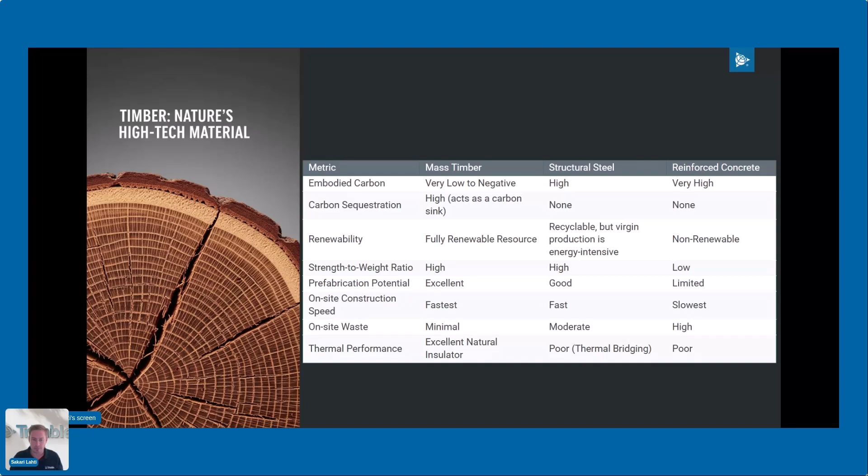Of course, it's not the material for all different places and occasions. There are other materials with good characteristics, so you always need to consider the best material for the best location. But it's definitely something that will likely increase because of this environmental push for greener construction.

One big trend happening generally in construction is that you need to build faster, build smarter, have prefabrication, have automation, and all of that is very well linked with the possibilities of timber construction. That translates often into requirements for the software, and especially what we can see is missing from the market—if you're doing hybrid construction, which is the trend in timber construction anyway, you need that multi-material capability of combining different materials to come up with the most optimized solution from the building aspect.

And you need that level of customization just for the timber connections, for example, when you combine steel with timber. Projects are getting bigger—the owners and contractors are getting more ambitious on building with timber, and that creates pressure for the software you use for design to have the capability to handle large models, with multiple people working on the same model at the same time.

So taking these two aspects moves things away from traditional timber-only focused software to something more generic. And of course, customizability—you need that flexibility to define your own connections, do the detailing like you're needed to for that exact project. You need interfaces to different systems and also to different machinery, as explained, so you need those APIs to connect to multiple different places.

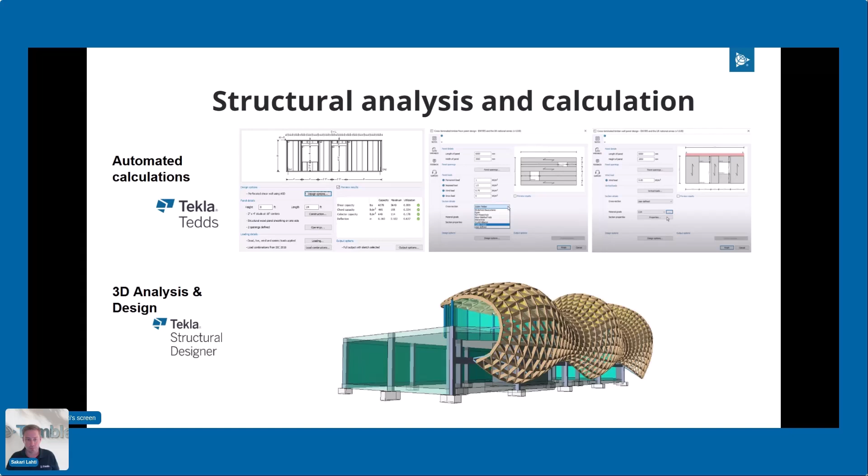If you look at the Tekla offering for timber, we have Tekla Tedds, which is a great tool for simple calculations, and we have quite a few different libraries created for timber construction. That software has been heavily used already for quite some time. And of course, Tekla Structural Designer is capable of handling timber as one of the materials for design.

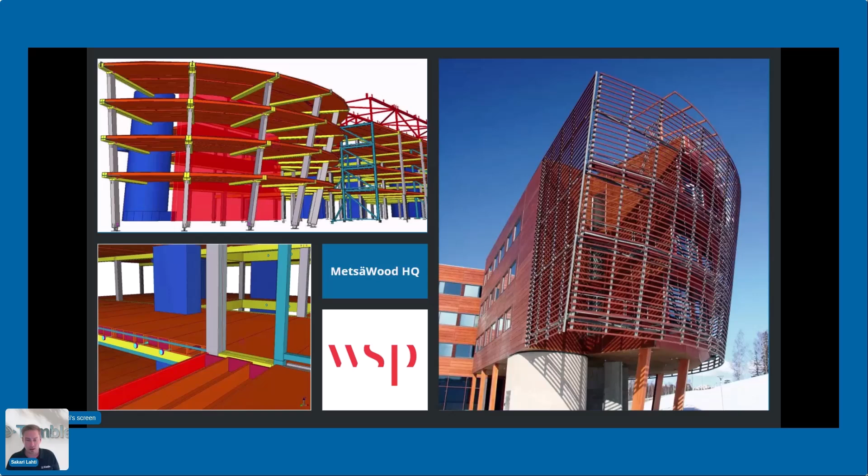And if we go to Tekla Structures, timber has been used with that also over decades, so not a new thing in that sense, but it's something our customers just realized when they first started with steel, and then they had a project that needed timber, that our tool is actually quite flexible and capable for that.

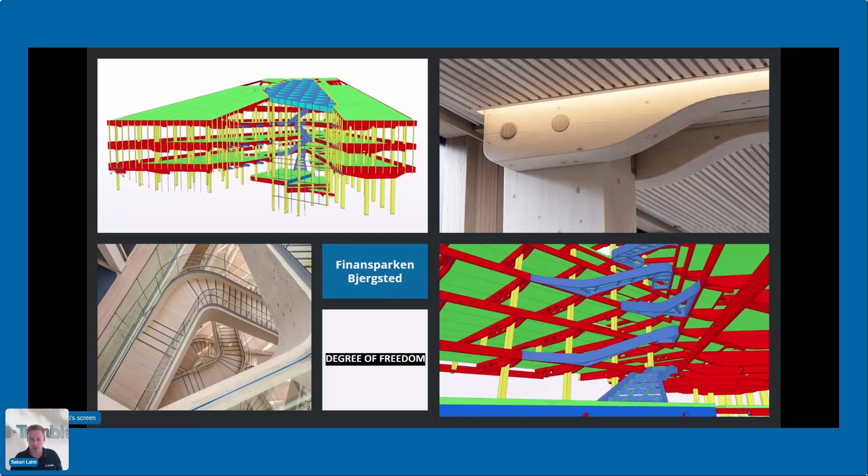So just a few examples, also really nice projects done all over the Nordics, in Sweden especially. Great achievements there. But I want to take a moment to promote Finland, where I'm from.

Just a week ago, this project won the highest architectural award in Finland. It's called Katajanokan Laituri, which is right at the city center of Helsinki. The architecture, the scale, and the beauty of the building is so nice. I highly recommend visiting this building in Helsinki if you by any chance are visiting Finland.

Here is a short video of the project images blended with the structural beam model that contains timber, steel, precast, and cast-in-place structures of the building.

Some numbers of the project: it is Finland's largest mass timber building by volume. Now that it's finished, last year, over 7,600 cubic meters. It almost had 2,500 unique prefabricated elements, and the timber used in that has stored over 6,000 tons of CO2.

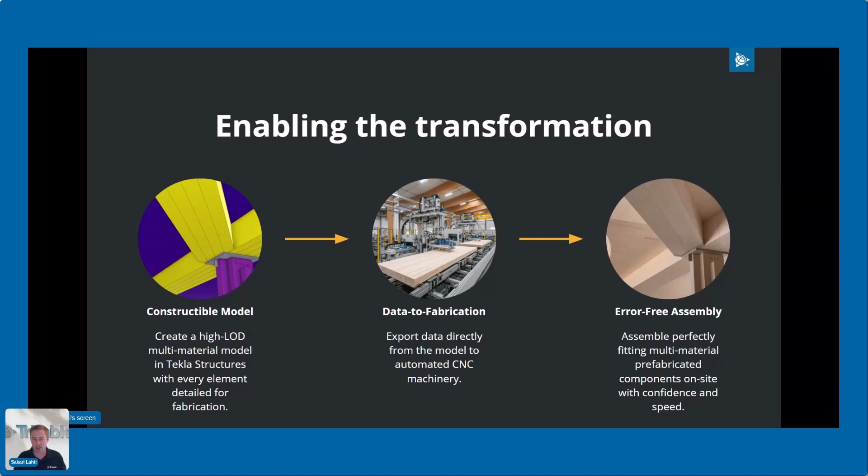Stora Enso, who was the timber manufacturer for those structural elements, took that data and transformed it into automation data in the fabrication. And of course, this process leads to an error-free assembly.

Looking at the problems in timber construction in general, I see two categories in my opinion: one is around standardization on many different levels, and also the production data, how to commonalize that process so you don't spend time iterating the same information to different systems and making errors during that process.

One example about standardization, you can probably find by Googling TIM 2025. There was a project last year or this year completed in Finland which had the goal of unifying the methods of modeling, not the actual modeling, but what the final output of the model would be for the timber industry in the BIM environment.

With that project, there are also some standard drawings, or let's say recommended drawings, for how drawings should look in timber construction. These kinds of agreements or guidelines are really good to standardize the industry, and it also helps us as a software provider to provide something that is not just for one customer, but for many customers.

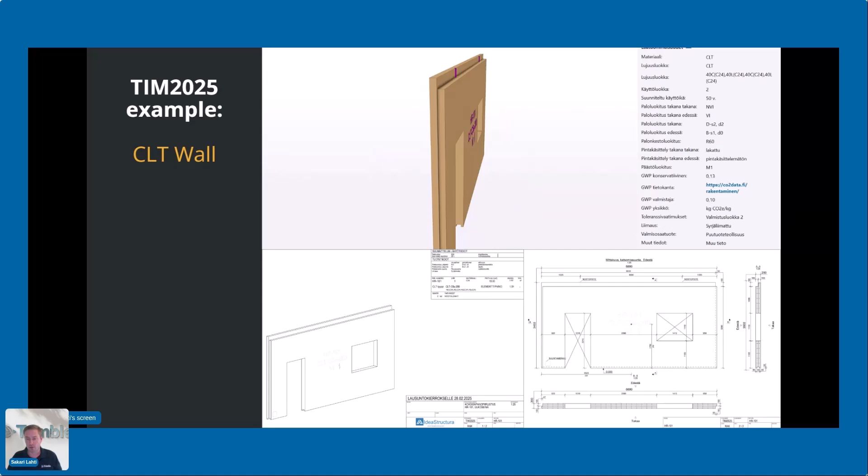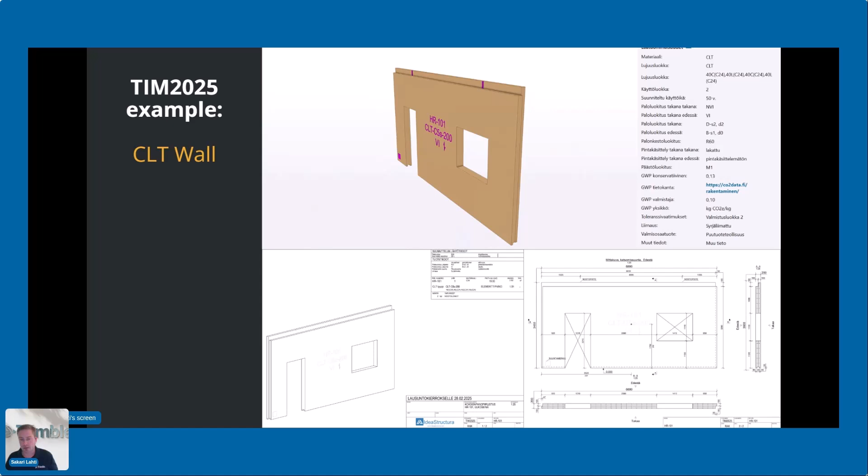And it also creates some motivation for us to deliver common methods of modeling these kinds of timber objects.

A little bit about the process of timber from the timber manufacturing point of view. When you do a project, there's roughly 30% happening in the BIM coordination. You coordinate with the structural engineer, then you do the detailing, which is the bulk of the work.

Now with Tekla Structures, like mentioned in the Katajanokka project, you can create those IFCs that the CNC machine operators use, and they can convert that information in their software, and they can define those critical processing information, which is the operations, the grain direction, and the placement for production.

Anyway, in mass timber products like CLT, you do the production through nesting. So you want to place those different elements and optimize the usage of those big CLT panels in the production. That is what is happening anyway on their side in the CNC operation.

But we do have, for products that don't necessarily need nesting, BTL formats available via our partner Construsoft, who provides these exports where you can go directly into production from Tekla Structures. Of course, that requires that you define those operations in Tekla Structures and in those cut part objects, but that can enable a workflow to production without the additional nesting need.

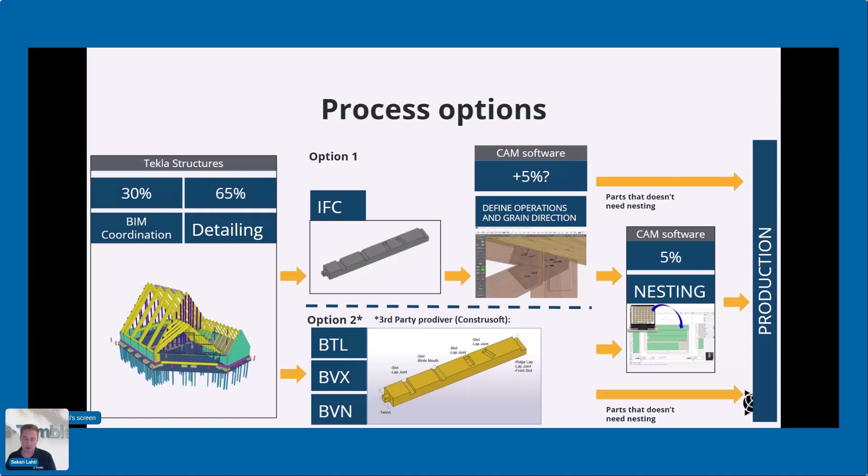Okay, let's go to 2025. What's new there regarding standardization and something we've acknowledged for quite some time, that we don't actually offer any kind of timber tools with the software. Now we have timber objects provided in Tekla Warehouse, and the benefits of using these tools...

depends on the preference of the customer. I would say customers have been using steel objects or concrete objects to model timber objects. But now, when you use these tools, you can have your own customized standard settings, so you don't need to mix them with other materials.

It makes it easy for anybody to learn and find the tools that should be used. There are also predefined properties that are visible only for timber objects and relevant only for timber objects, so we don't pollute the UI with information that's not relevant for other object types. These properties can also be used in a filter, so you can easily see which objects are timber object types.

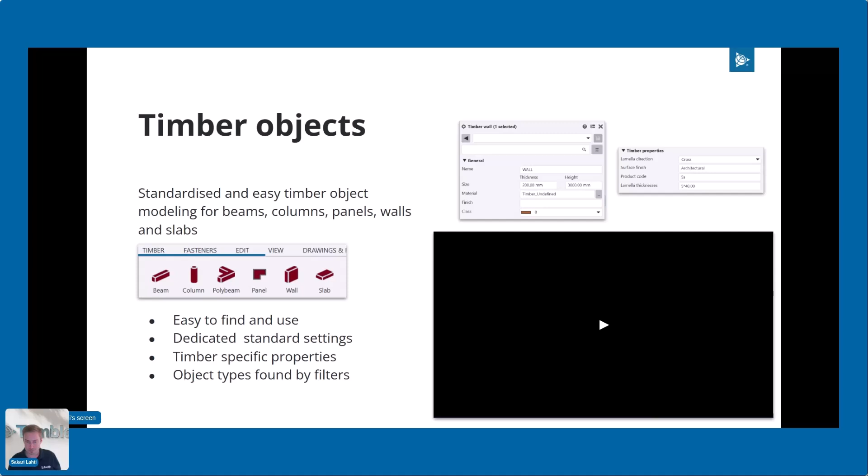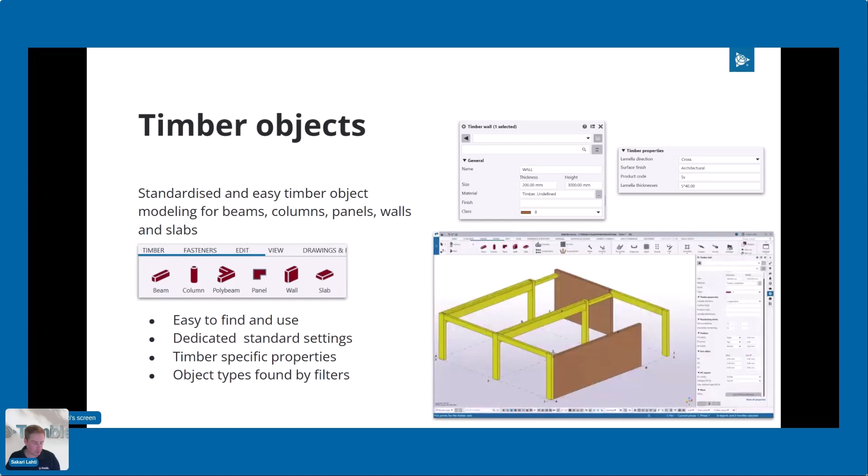Let's see if the video plays. Yes, I think it's playing. Here you can see very basic usage of those tools, and I think we might have time for a short live demonstration also, if I just know how to switch to my actual screen.

So if we go here, yes, and then Tekla Structures. Will somebody... thanks. So you will get this timber tab in Tekla Structures once you install the extension, and these are the tools that will come with it.

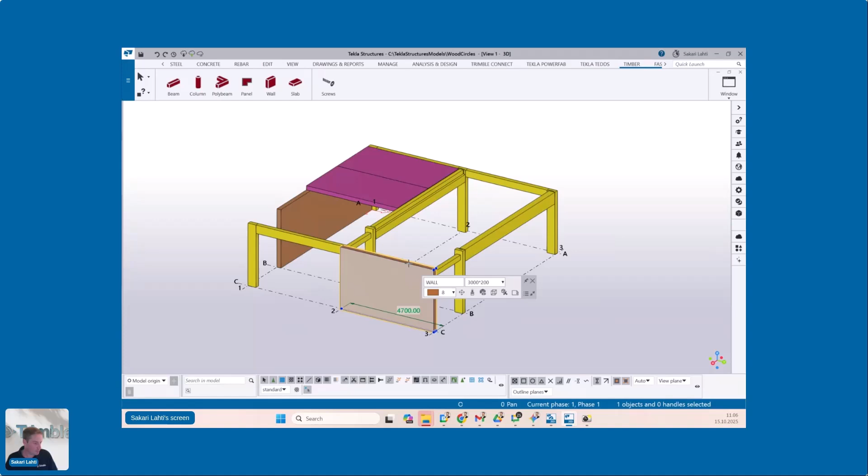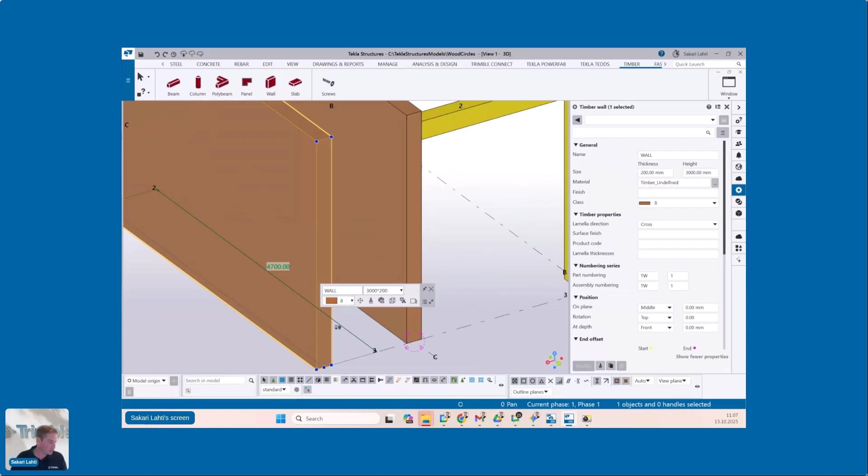For example, the wall modeling is very similar to concrete panel modeling, but a few things I want to show here is that it's actually called a wall, not a panel, and it only has thickness and height, which is quite nice for any wall type, as you might have situations, for example, you might have situations where you have different...

Sorry, I'm getting pop-up messages on the other screen about expanding the view area. You might have situations where you have different heights, but you would only want to change, let's say, the thickness for the walls. With this approach, that is possible, and it also makes it unified, what is the thickness and what is the height. As you know, with the parametric profile you have something like 160 times 3000, which is the profile.

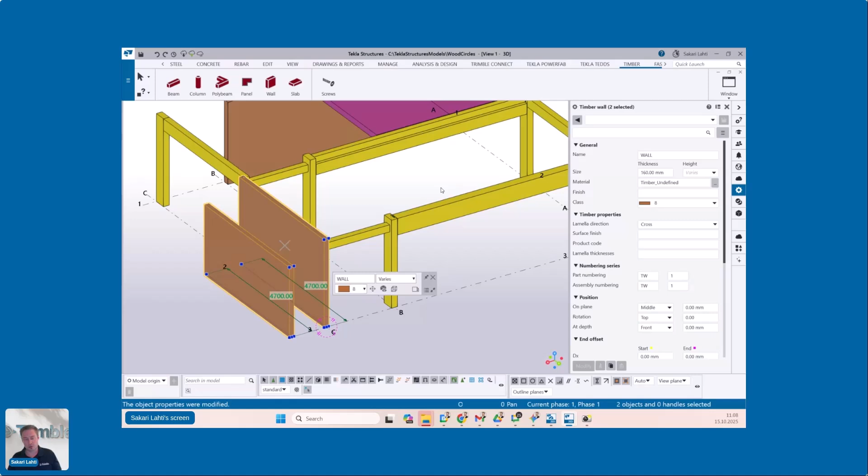And underneath that is the profile also here, but depending on the user, they might have a different way of defining that, and that then leads into problems when you start to create drawings or send data onwards.

One aspect regarding the speciality of this is that if you have defined, let's say, CLT materials, for example like here, you can find actually, if you go to Tekla Warehouse and type CLT, these exact examples from our main CLT providers in the market.

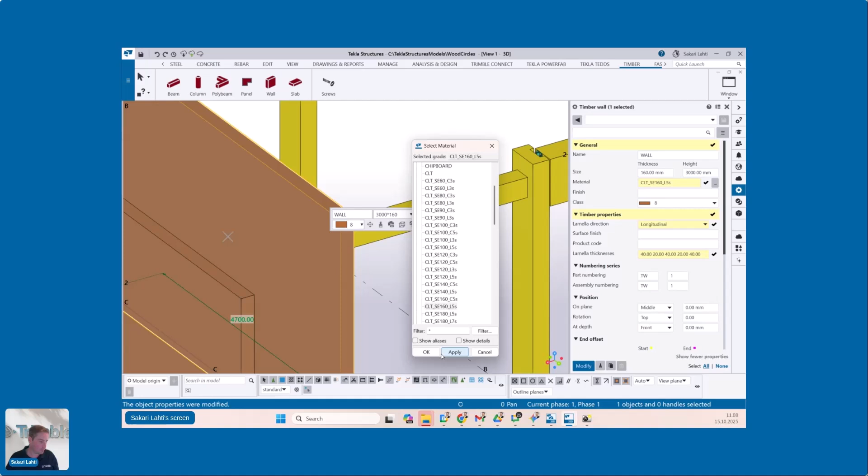But anyway, if I set this type from this manufacturer, you can see that it automatically fills the lamella thicknesses property, because that is defined also in the material product code. It would also have changed the thickness of this wall, because it wants to make sure that if you go from that route to define what CLT you're using, it will actually change all of those properties.

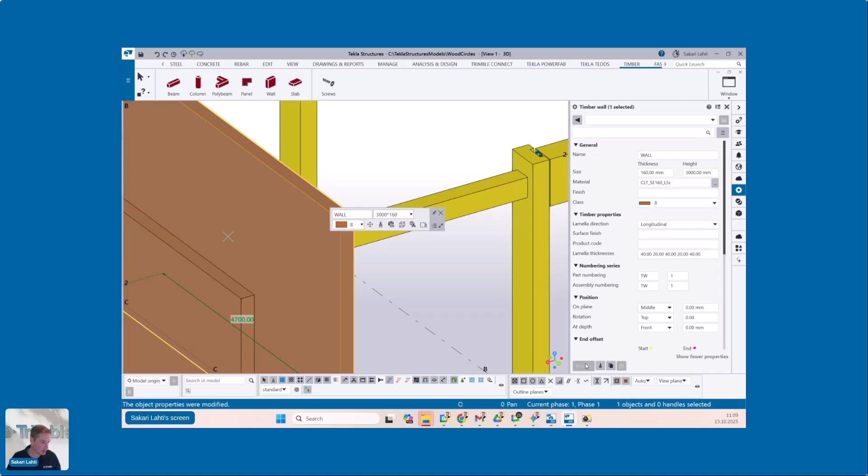That's a nice way of standardizing the way of modeling, making it a bit easier and more intuitive when you're doing only timber modeling. Good, but that would be, let's say, the specialities.

We have the same approach for slabs also. For example, there you define the thickness and the width, and with this approach, as it's like a beam object, we avoid the potential problems with the coordinate systems. If some users might model as a plate, you might run into coordinate system problems with that approach.

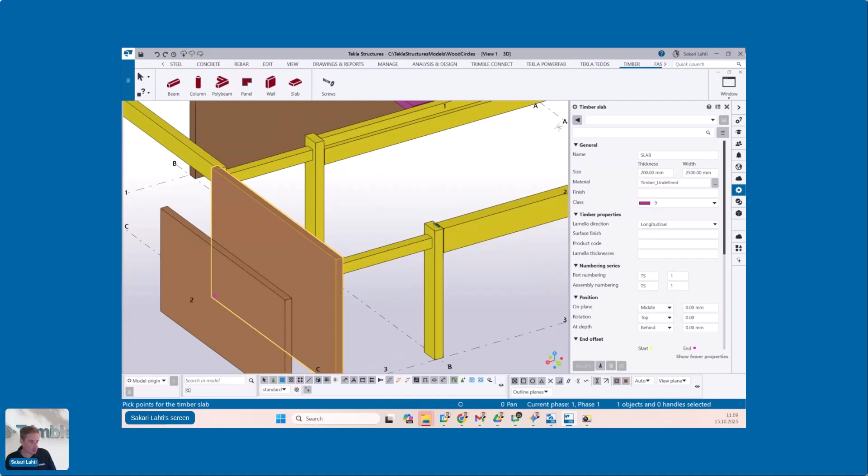One extension we created is this marker tool, which can be used for whatever object types, but especially for CLT, where you need to define that grain direction, or you want to share that in a 3D format so the CNC operator really knows this is the grain direction, even though it's also a property. So this tool is intended for that too.

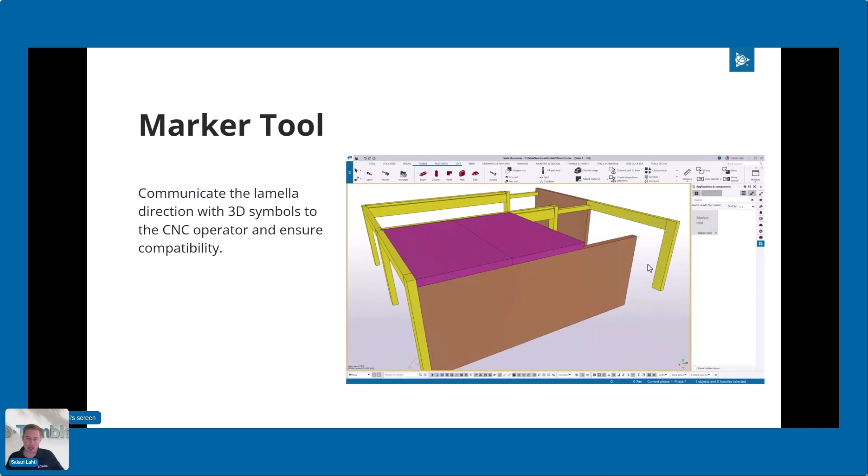As you remember, for the CLTs you had the grain direction or lamella direction property. With this tool, it can automatically apply the direction according to that property, so there's no risk of having misaligned information.

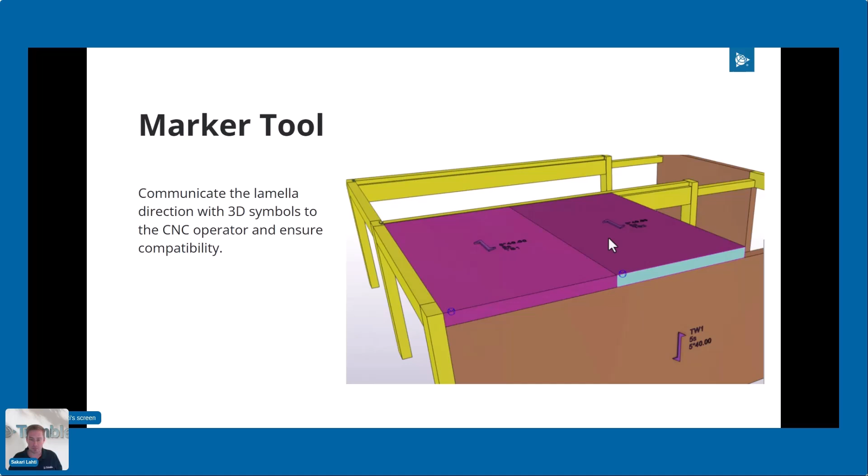The last thing is this common screw object type, which is in the core like a bolt type. The nice thing is that you don't get an overwhelming amount of things on the UI. It's clear that this should be used for modeling screws.

There are quite many different variations of what I've seen our customers doing for that at the moment, and they might run into performance problems, for example, if they're using parts, especially multiple parts, to represent one screw. So this is very lightweight.

Again, you have only the common properties. We are also providing an example set of common screws because you need that as a catalog type, so you cannot freely enter the diameter and length. You need definitions of those screw types, but the example set is quite extensive.

Then you can define the threaded length, either from the tip or from the head, and the additional product code, which is probably the most important information you want to show in bill of materials or drawings.

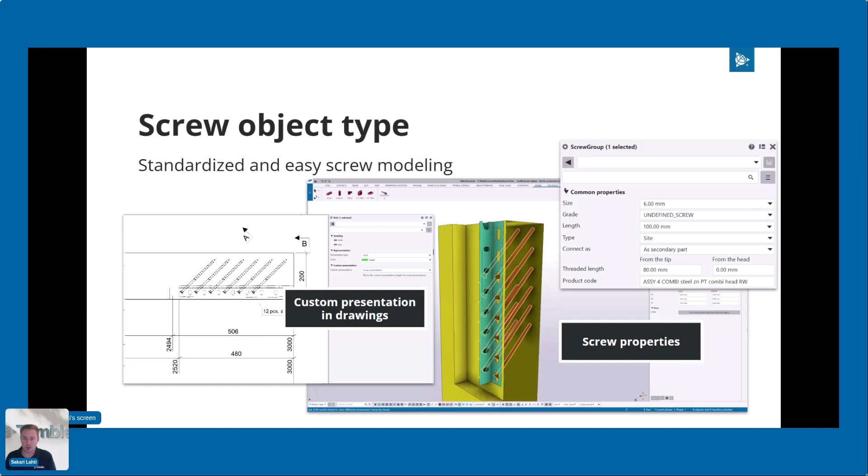All of what I presented can be downloaded from Tekla Warehouse. All of it will work after, I think, Service Pack 8 of 2024, or then the 2025 version.

We have still a few minutes left. I know there will be great presentations after me about these things, but just from the timber aspect, I want to highlight three things which I think are really nice for this 2025 version.

First is the Tekla launcher, meaning you have the environments in the cloud. You don't need to download and find different environments if you just want to browse and see what other environments might have. It's really easy now to select whatever environment and model template, for example from some environment, and explore if it has what you're looking for, or if you suddenly need to do a project for another country or client.

Again, regarding constructs, you might want to check, for example, the constructs of the European environment—they have some timber-related localization done there. I know that Sweden and Norway also have this. So it's good, but faster to explore what's on the other side.

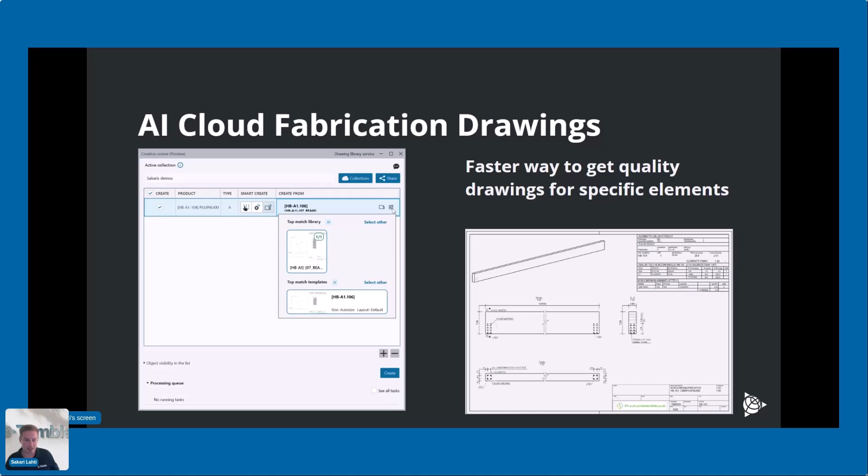But now, with this AI cloud fabrication drawings, you might just do everything manually first, and then already the next one will be quite good. At some point you've created so many drawings that the outcomes are quite good, even though it's not based on rules. It's just based on finding the best match and cloning from that. But I think this will lower down the time to get quality drawings, especially for specific elements, compared to the traditional setups.

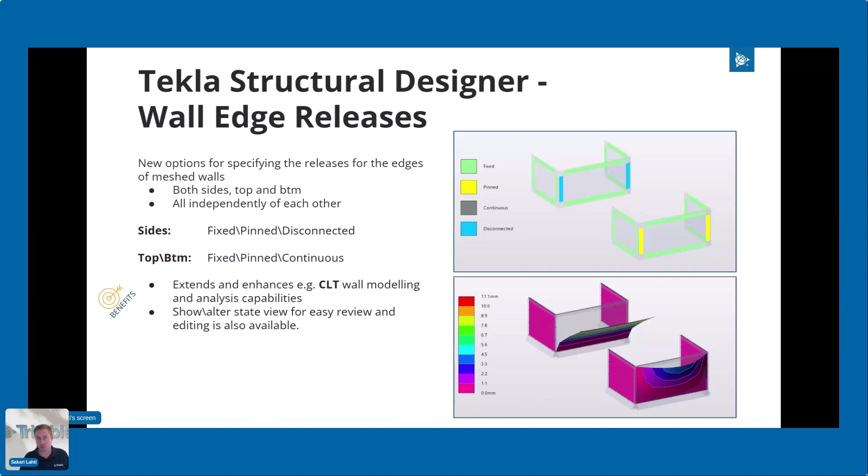And final thing related to Tekla Structural Designer, there's a new feature for wall edge releases, which is very important for CLT constructions. So you can define those separate releases for the sides or for the top and bottom, making it possible to define the structure to act like it would act in reality.

Maybe just to highlight that for timber, and I would say for all the materials, the customizability is inevitable, and that's why we have custom components. We have API, we have warehouse where to download more stuff. There's a developer center that can help you if you're not into API yourself.

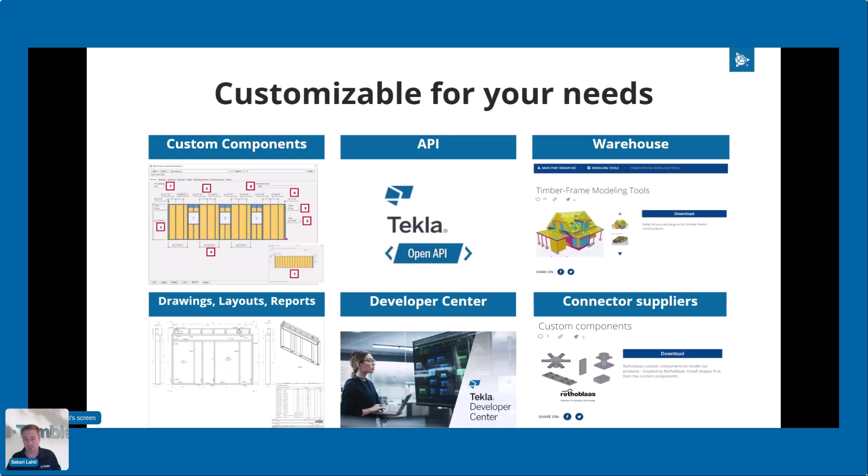I already mentioned Construsoft being one of those players heavily focusing into timber developments. And we have the connector suppliers found in the Tekla warehouse. For example, for Rothoblaas, they are providing IFC objects in their own web pages with a much more extensive catalog. So again, you can take those IFCs, convert them to items, and use those in Tekla Structures, for example, if you need some of their connections.

And what I've been mentioning already, the mass timber, that is something that I clearly see Tekla Structures being not out of the box, but with its basic capabilities, it is something that is well positioned to be the tool to be used in that type of projects.

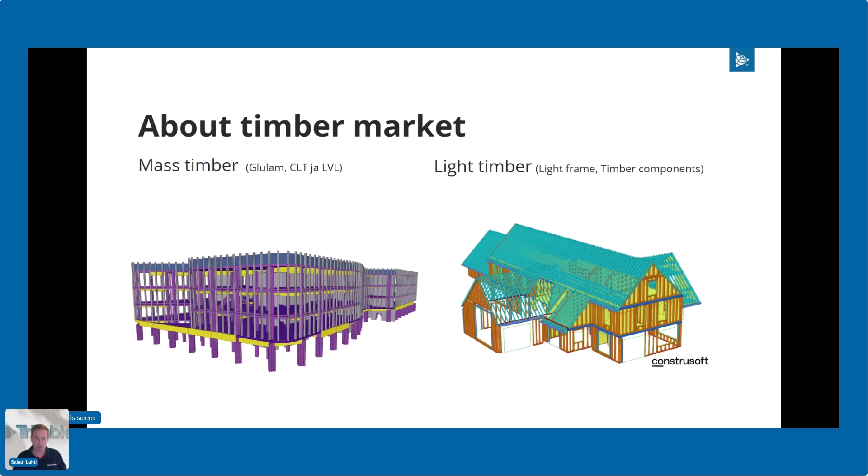And then when it goes to light timber and housing and this industrialized timber framing construction, you might need that extra set of tools, and for those I would encourage to reach out to Construsoft, as they have lots of experience from the Benelux areas with customers doing that type of projects with Tekla.

If there's any questions.

Thank you very much for your presentation, Sakari. I am personally really happy for this development, finally. We have a question for you: how do you get the information on the beam in the IFC model?

Perhaps you need some further explanation. Yeah, well, if I understood correctly, maybe it is related to these new timber object types, and if you can get the information to IFC - that is all possible. Those are like the Tekla steel parts inside in that sense, and in the property set manager, you can then define your property sets in the way that you include all the properties that you desire. But that is something you probably need to do yourself now, because it's quite new development, and eventually I hope the localization will catch up and have those settings pre-made for you. But at this point, it is possible to do that by configuring the property sets of the IFC export. I hope that was what the question was about.

Yeah. Otherwise, you can write again, Simon. We have no further questions, and thank you, Sakari.